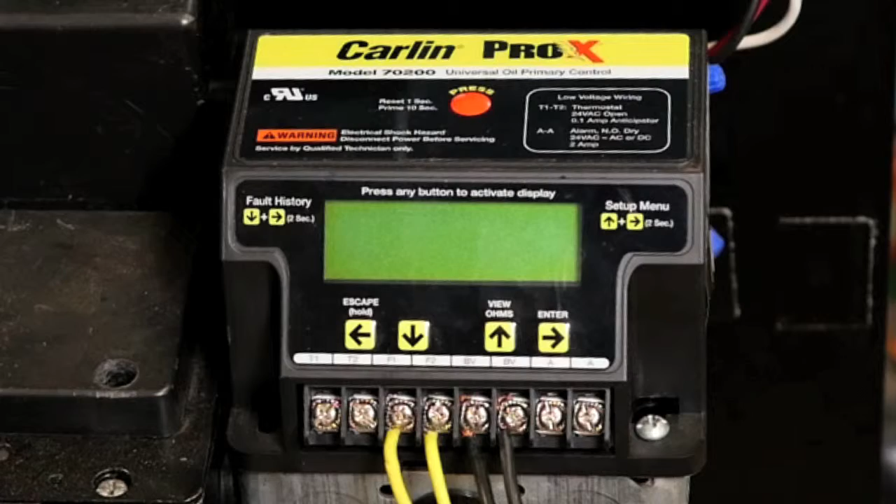In this video, we will discuss and install the Carlin Combustion Air Proving System, or CAP system. The CAP system is designed to work with the Carlin Pro X 70200 primary control. It utilizes the BV contacts and block vent feature to shut down the oil burner in the event combustion air supply is interrupted or blocked.

If no airflow is detected during startup, the Pro X 70200 will abort startup and shut down the burner. If the air intake is not blocked during startup, but becomes blocked during a normal run cycle and remains blocked for 20 seconds, the oil burner will shut down and make up to 3 attempts to restart.

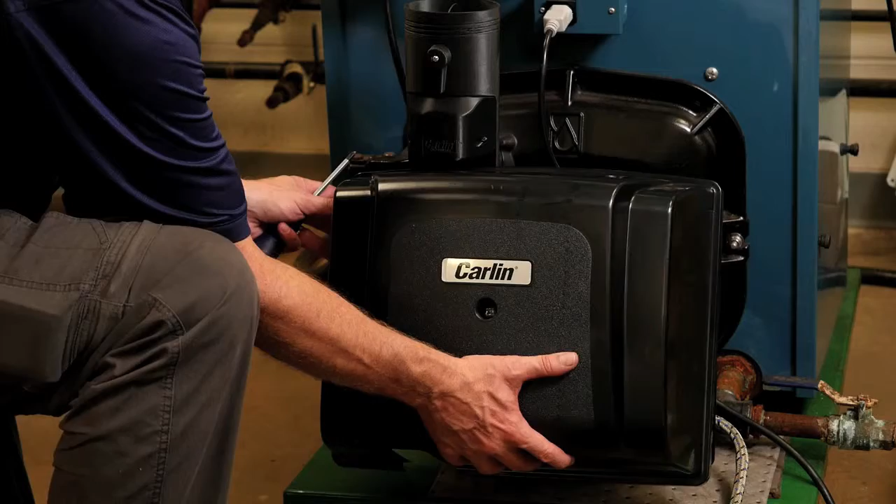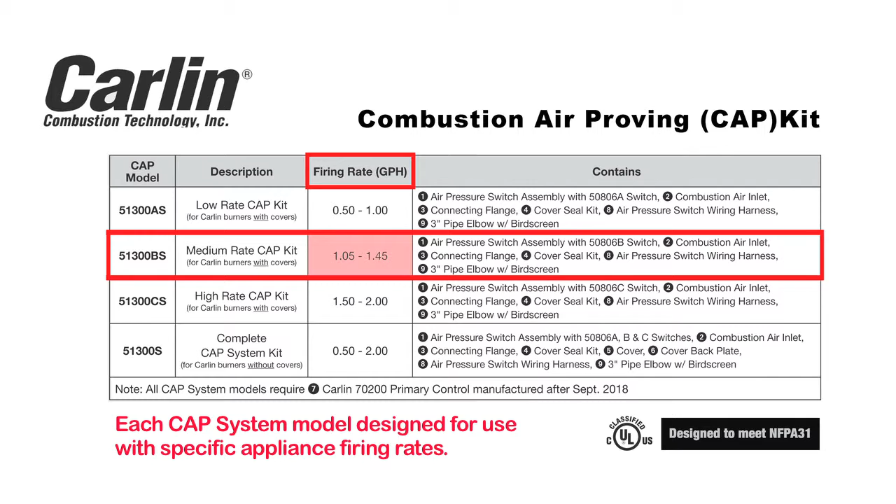The Carlin CAP system works together with the Carlin burner cover and back plate to form a sealed intake system that can be connected directly to the outside for combustion air. The CAP system is available in several models, as a CAP kit standalone or with a burner cover and backplate. To install a CAP system, follow these simple steps.

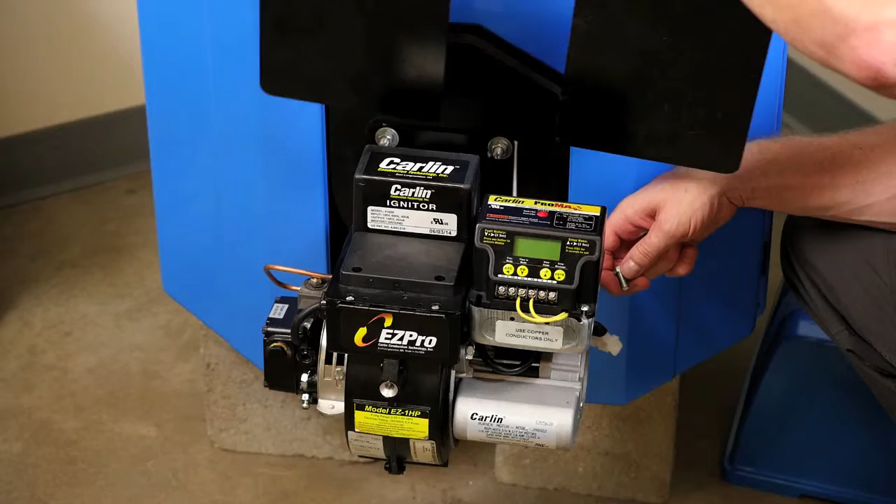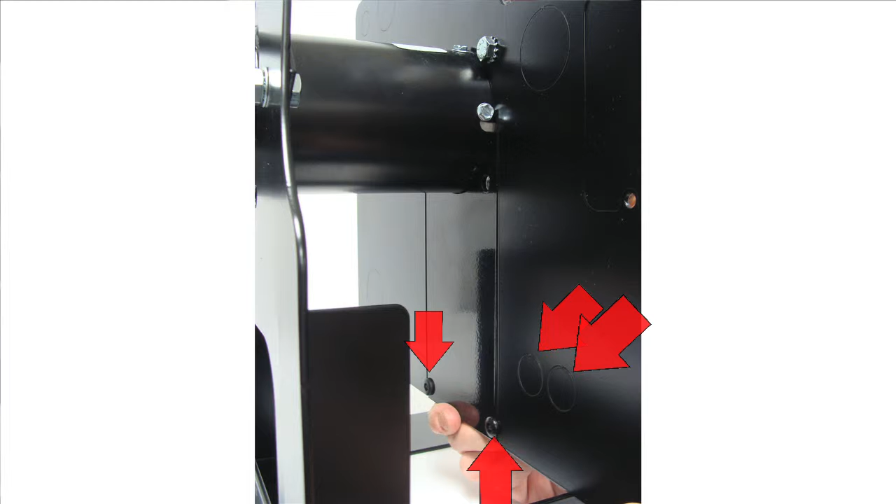Before you begin, disconnect all power to avoid electrical shock or damage to the system. Mount the burner cover backplate and filler plate to the burner chassis. Use the included plastic rivets to align both plates. Route the oil lines and all wiring through one of the knockouts in the backplate. Use the grommets and plastic plugs provided to seal all openings in the backplate. Be certain to install the rubber filler into the bottom of the burner cover.

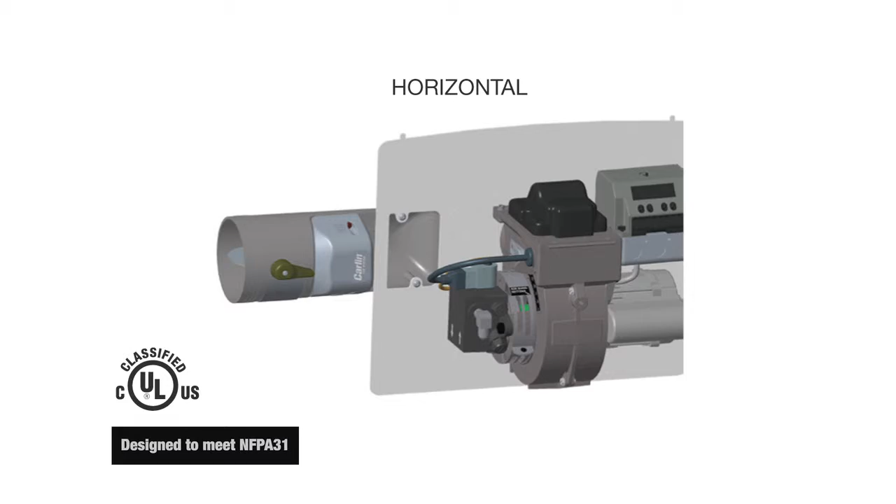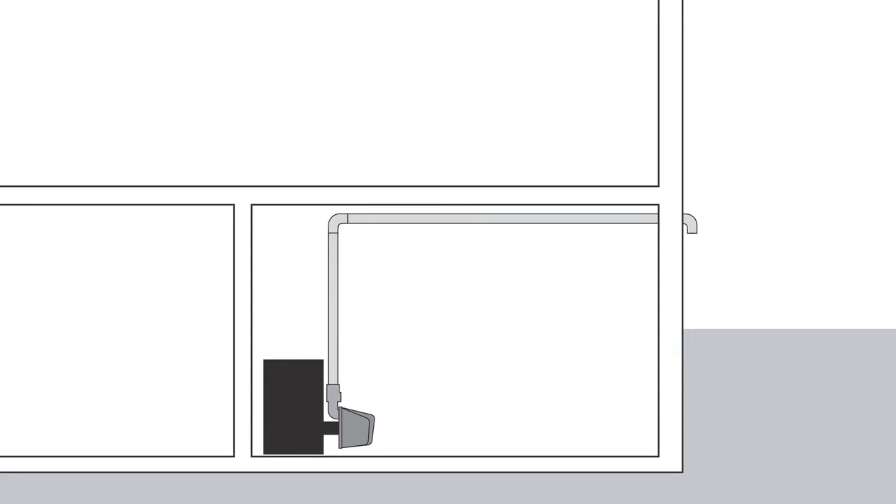Select the best orientation for installing the air inlet adapter. The CAP system adapter may be installed in either vertical or horizontal. A 2-inch by 4-inch knockout is provided in the back cover plate. Note that the maximum length of pipe from the burner to the outdoor termination should not be greater than 80 linear feet. Each 90-degree elbow adds 10 linear feet to the total length.

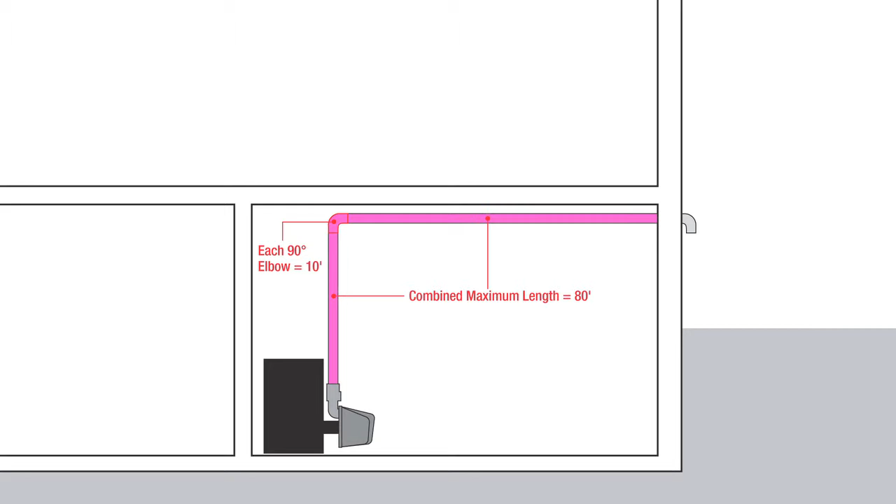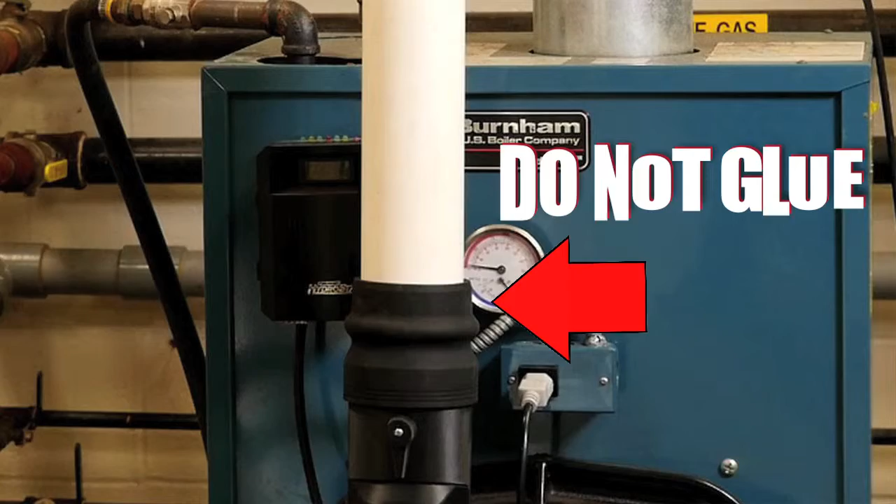Once the air inlet is secure, slide the connecting flange onto the air inlet until secure. Use 3-inch Schedule 40 or Schedule 80 PVC pipe. A tight fit and PVC solvent cement is necessary to assure a leak-free connection. Do not glue the PVC pipe to the connecting flange. The outdoor termination provided uses a bird screen for protection from any nesting critters.

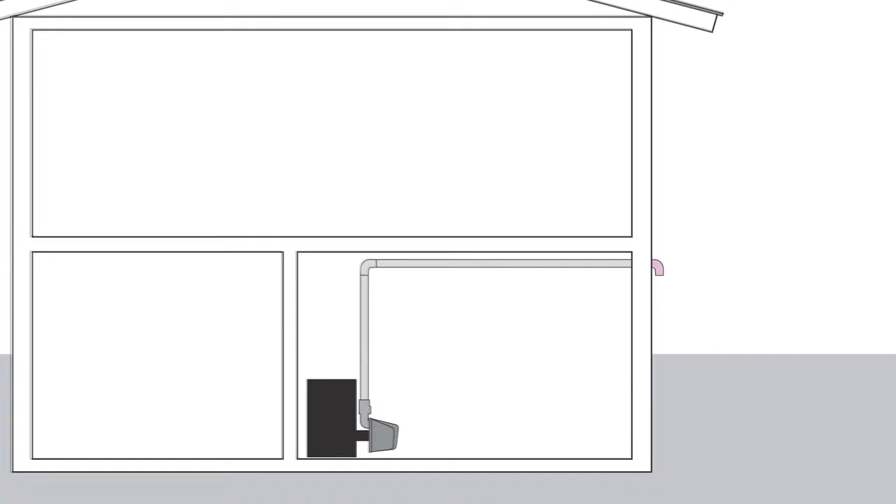The outside termination must be 12 inches above grade or the highest anticipated snow level and away from locations where snow drifts may accumulate. Combustion air intake should not be any closer than 12 inches to any vent inlet or outlet. Always use sweep elbows for all combustion air piping. With all intake piping connections in place, check for proper support and check all joints.

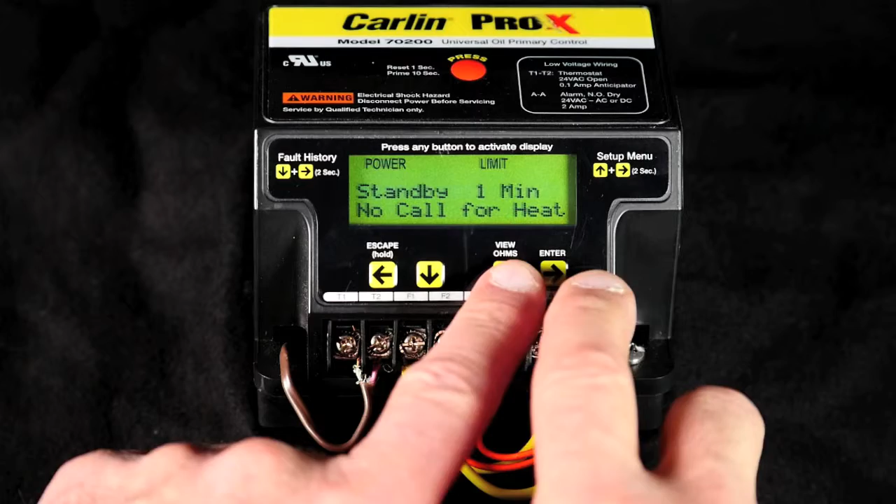Route the wire leads from the air inlet switch to the BV contacts on the Pro X 70200 primary control. Only a Pro X 70200 manufactured September 2018 or later will have the blocked vent air intake feature. To activate this feature, you must enter the setup menu. The setup menu cannot be accessed while the burner is running. Eliminate the call for heat for standby mode and press the up and right arrow keys together for 2 seconds.

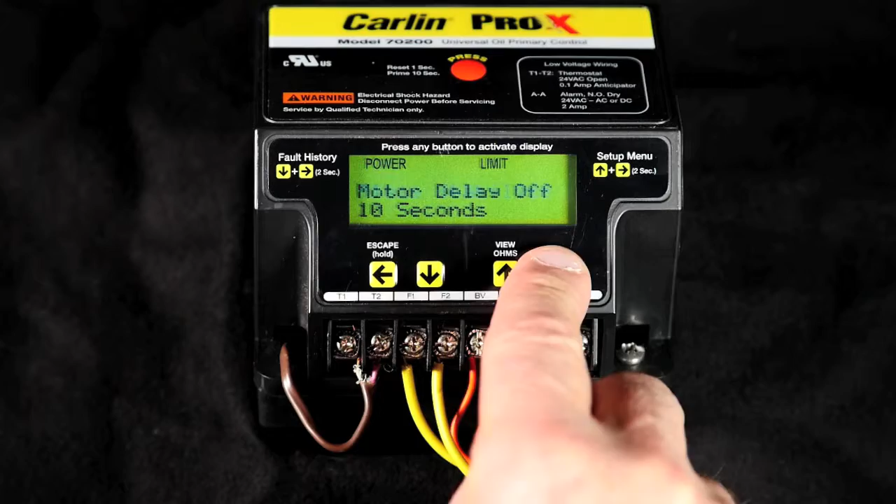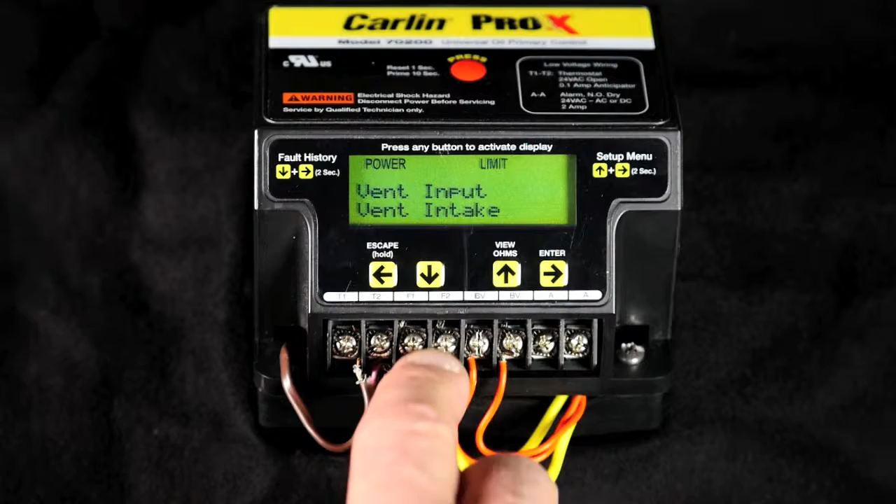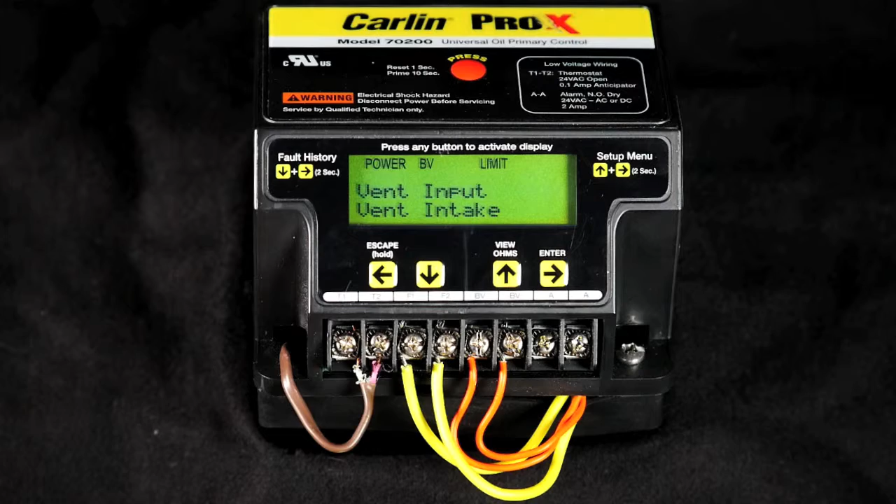Now, using the right arrow key, scroll through the different settings until you reach vent input. Now use the down arrow key and scroll down to vent intake. While intake is still displayed, press the right arrow key again to make the change. The word entered will appear, indicating the change has been made. Press and hold the left arrow key for 3 seconds to exit the setup menu.

Now mount the burner cover by aligning the two holes in the top flange of the cover with the two mounting tabs on the back plate. Pivot the cover into position onto the oil burner and tighten the mounting screws located in the center of the cover. Tighten securely to prevent room air from leaking into the cover. The oil burner is now ready to operate.

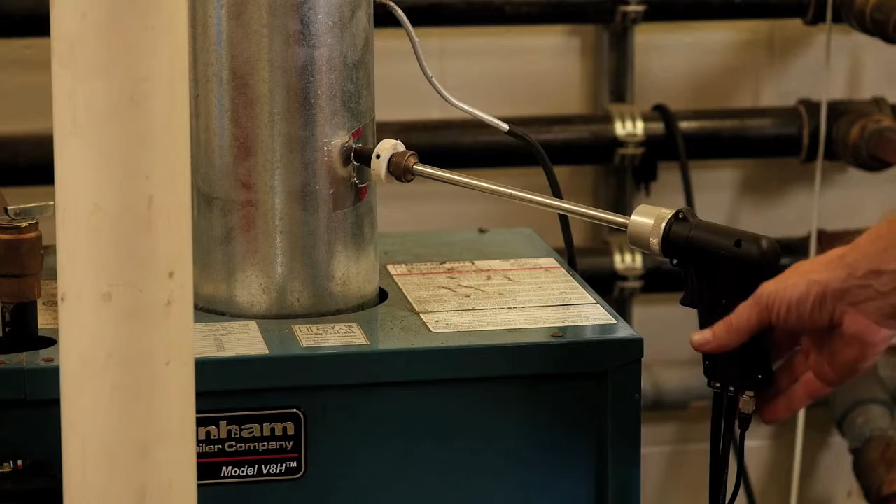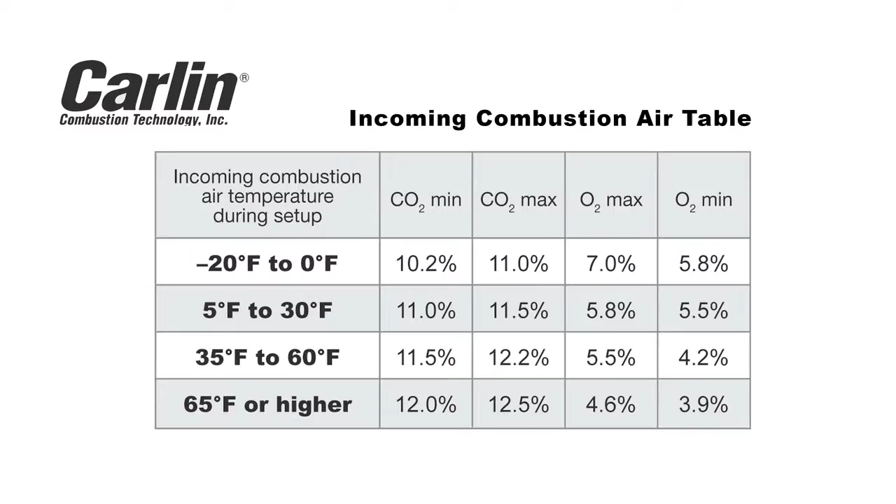Since adding a cover and a ducted air intake, the combustion characteristics of the appliance may change. So it is important that a combustion test is performed to ensure proper operation. Outside air for combustion will fluctuate by season and will significantly impact combustion. Use the table based on outside air temperature at the time of setup to ensure proper burner setup. When testing combustion, always reinstall the cover after making adjustments. It is sometimes necessary to repeat this process more than once for proper setup.

With the burner setup complete, the final step is to test the CAP system operation. With the burner firing, move the test lever to a test position. Following a 20-second delay, the burner will shut down. The Pro X 70200 will allow the burner to recycle up to 3 times in order to prevent nuisance shutdowns caused by temporary blockage or high winds. If the blockage persists, the burner will shut down and a lockout will occur.

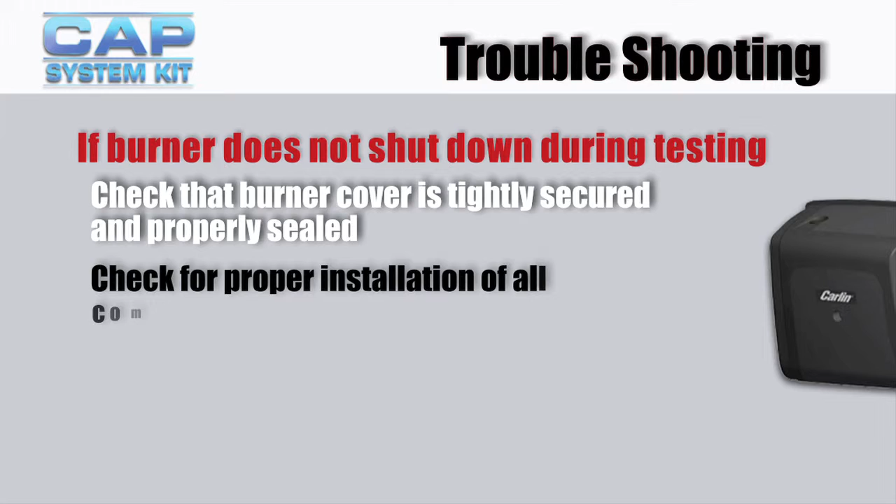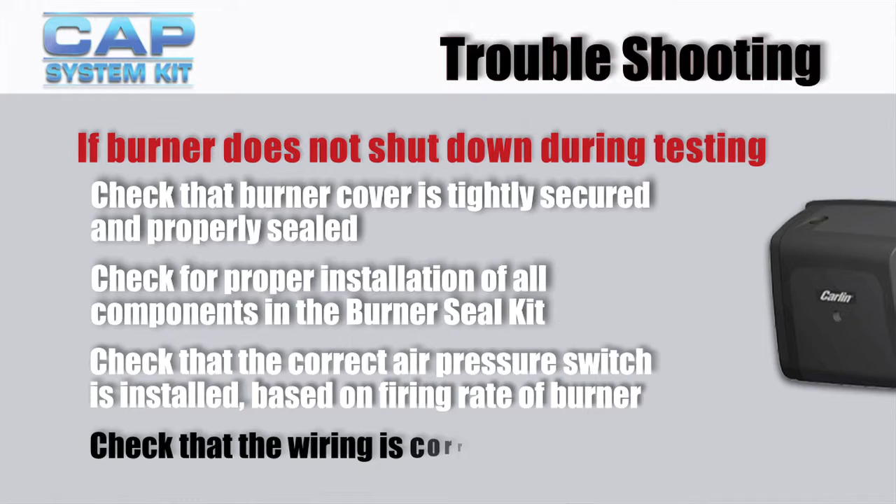The CAP system operation should be tested at least annually. The ducting and outdoor termination should also be inspected annually. If the burner does not shut down during testing, check that the burner cover is tightly secured and properly sealed. Check for proper installation of all components in the burner seal kit. Check that the correct air pressure switch is installed based on firing rate of the burner, especially if the firing rate of the burner has changed. And check that all wiring is correct.